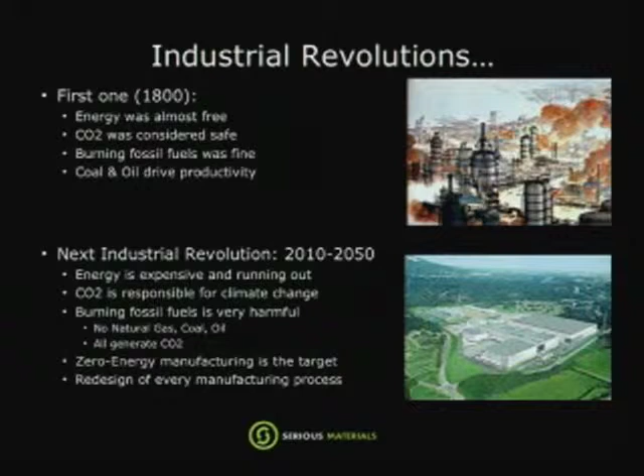I'm going to start with the Industrial Revolution, back in the mid to late 1700s and into the 1800s, primarily the Industrial Revolution that arguably ran to the late 1800s in this country. The Industrial Revolution actually started in England, and England at the time was an absolute powerhouse of the world, the big country that sort of controlled the world. They had all the technology. We were too young to start in the early part of the Industrial Revolution, but we came in later, and by the mid-1800s we owned it, and we did very well with that.

But the Industrial Revolution was built on some concepts that are just plain wrong by today's standards. First of all, energy was free. The entire Industrial Revolution was built on the concept that we had a steam engine, and later gasoline engines and other things that could run on natural gas and oil and these kinds of fossil fuels, and that they cost so little that basically we could eliminate hundreds or thousands of jobs and just have this machine do that job. And that was the concept. And CO2 was safe, it was just a clear gas. In fact, we probably barely knew how to measure it. Burning fossil fuels was great, and coal and oil drove that productivity.

But today there's a new industrial revolution, a next industrial revolution that we have an opportunity to lead. And we have an opportunity to lead it because all of the premises of the Industrial Revolution back in the 1800s are now wrong. Because fossil fuels aren't safe. You just all raised your hands about the environment. We know what carbon pollution is, we know what climate change is, we know how this is affecting the environment. So, if you follow this premise, we get to actually redesign most of everything you've ever known in your life, because it was all designed during the Industrial Revolution.

This is a very interesting chart. It tracks the relative share of world manufacturing output, going back to the 1700s. Notice that around 1950, just after World War II, we peaked—we made 45% of the world's goods. They were made in the United States. We made them all and sold them to the rest of the world.

People gave us dollars, and we paid back our debt from World War II—that's exactly what we did. We owned basic science, applied science, and manufacturing. We invented, manufactured, and installed here. It was a spectacular time in the economy. From the 1950s, it fell through the 70s and continues to fall.

The big change here, this red thing, is China coming up. There are some projections for the next 30 or 40 years, and you'll see that the United States continues to get crushed while other countries maintain their smaller statures. Japan, which was bigger, is going to get a little smaller. That's the relative change in manufacturing output across the world.

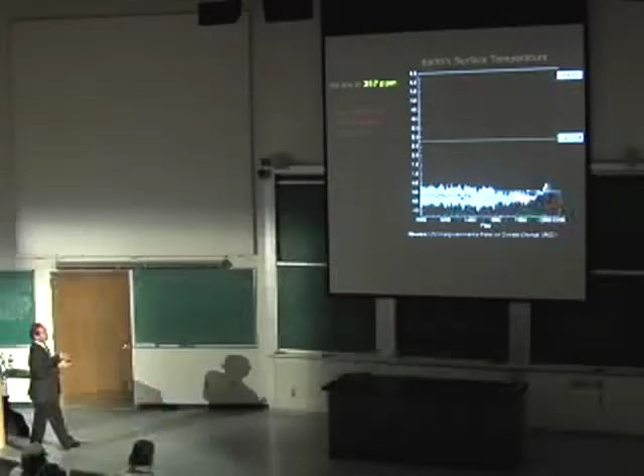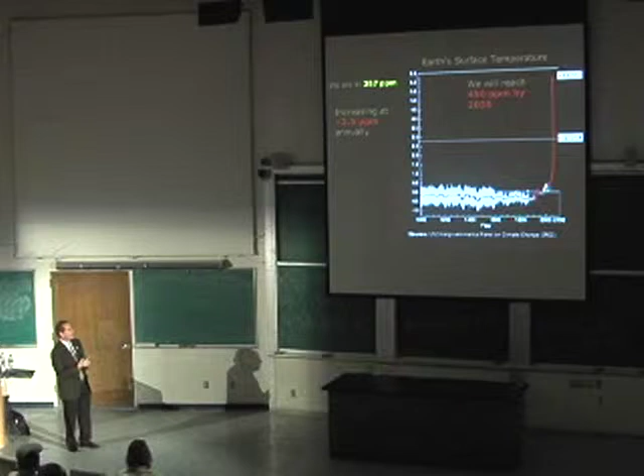At the same time, we've got this climate change thing happening. We won't go into a lot of detail, but we'll remind ourselves that as CO2 goes up, the temperature goes up—depending on who you listen to and what part of the IPCC you look at, somewhere by 2100 it could rise as high as 11 degrees Fahrenheit. This is real, this is happening, and we can look at a lot of data here.

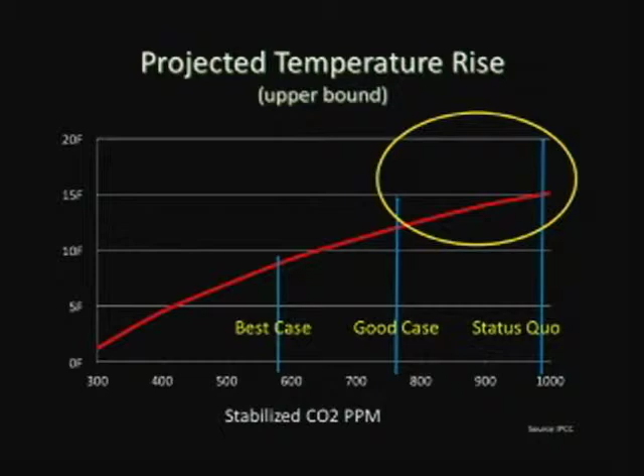This is another thing that comes right out of the IPCC, looking at best case, good case, and status quo. We're not saying how many years this would take—it could be 100, 150, 200 years. But if you look at stabilized CO2 ppm in the atmosphere and how many degrees Fahrenheit the Earth's temperature would rise, where we're headed right now is sort of into this range.

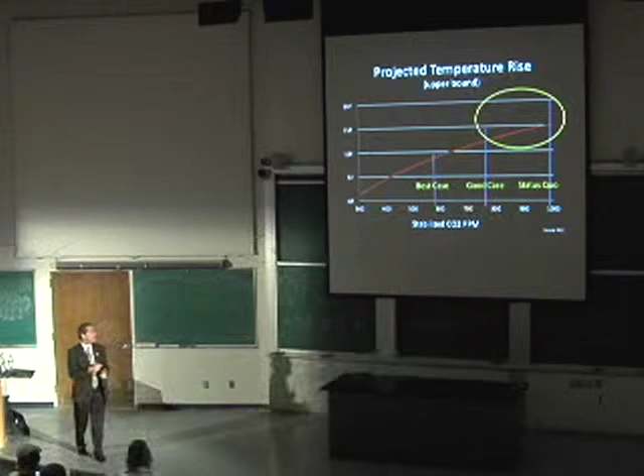If it's business as usual, somewhere between 750 and 1,000 ppm is where we'd finally stabilize—maybe 150 years from now—but that's a 15-degree Fahrenheit rise in the Earth's temperature. I assure you, we cannot survive with that kind of rise. We might live somewhere that's currently very cold, like northern Canada, but we won't be able to survive in other places.

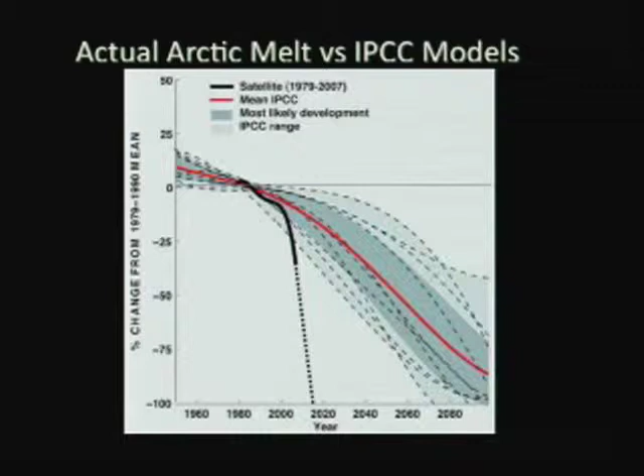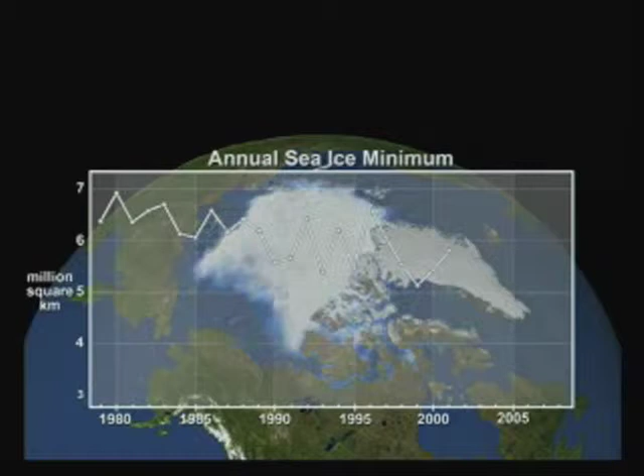This is the actual Arctic melt versus IPCC models. The IPCC models were very conservative—they said we'd see melting around 2100. This is the NASA projection currently, around 2017, based on satellite data from the last few years. It looks like we're going to have an ice-free Arctic much faster than we thought. These are actual satellite photos from each of those years, tracking it down until you can see we're more than halfway gone.

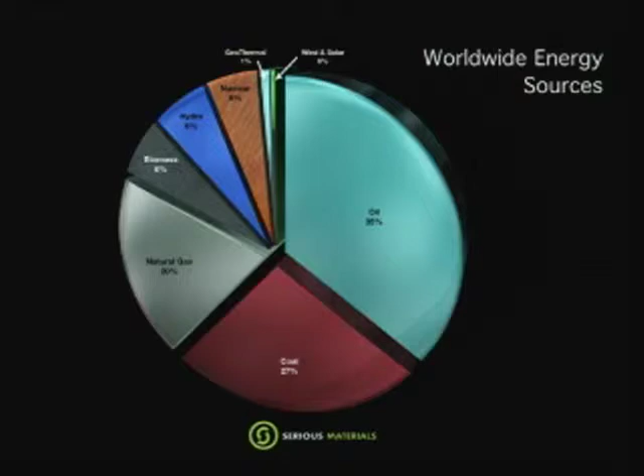So there's a lot going on here that's important. And the cause of all of this is what? Primarily it's fossil fuels. Now, this is a challenge for us because we have worked certainly since the 70s to put wind and solar all over this planet. And there are some countries that have tremendous amounts of wind. Right now, Germany and Spain have had great success with solar over the last few years. And obviously, we're pumping out solar panels as fast as we can throughout the world. And at the same time, as I stand here, wind and solar add up to 0% of the world's energy supply. We're not even at 1. We're at 0.

Now, that doesn't say we shouldn't do it. Don't mistake my words here. It just says this problem is huge. It's gigunda. And we're going at it with, you know, throwing little ants at it. Ooh, we made a solar panel. We put one up. And look, that's great. And I want you to do it. But we have to make billions of them. We have to make more than the entire output that we can possibly imagine of solar. In fact, as we look at where energy goes, I'll talk about how we can possibly use solar as part of the solution, but not a big part.

Worldwide energy-based CO2. This is a surprise to most people in this room. It's not that much of a surprise worldwide, but it is a surprise here. This is worldwide energy-based CO2: building operations and building materials. This is the making of building materials every year, and this is operating our buildings. Those add up to 52%.

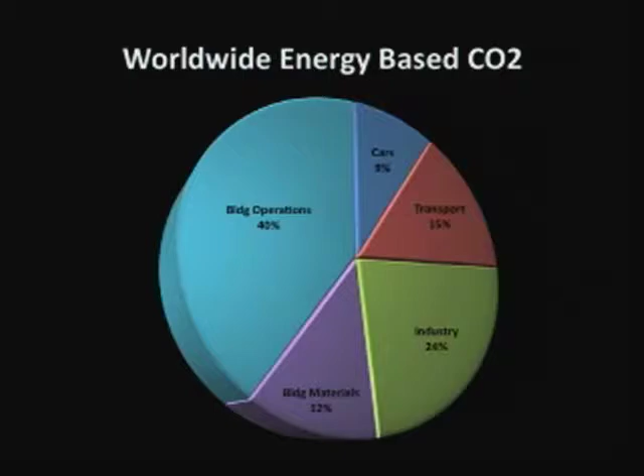Cars, passenger cars, the ones we drive, 9%. Now, in America, we think of cars as big, like the majority of it. Well, it's not generally the majority anywhere in the States, but it's equal to buildings in some areas of the United States, especially California, where we use our cars a lot. But when you look at the entire world as a picture, and CO2 is a worldwide issue, cars are tiny, and they're going to get solved with electric vehicles.

Buildings are huge. Now, that's interesting because it tells us we've got a problem, but it also tells us we've got a great opportunity. This is the worldwide energy demand, total worldwide energy usage today: electricity, gas, oil, transportation, everything that's used. Industry, about 12 to 14 terawatts per year.

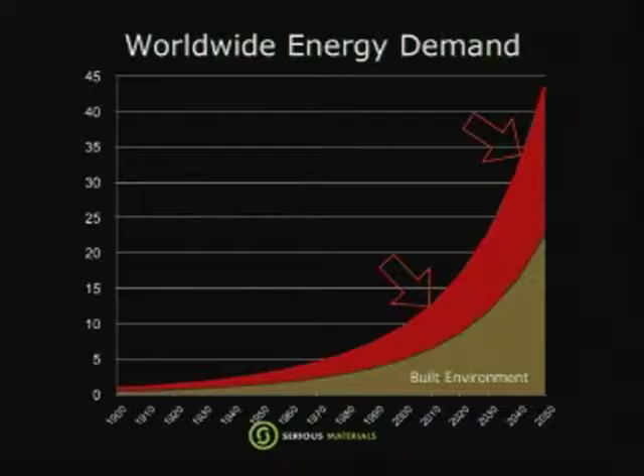That's growing, depending on who you listen to, somewhere between 30 and 40 terawatts per year over the next 30 or so years. So huge growth, more than doubling, some people say tripling, of the requirement for overall energy.

Now, here's the real truth of the matter. In our wildest dreams over that 30 years, the best experts in industry and solar think maybe we can get 2 or 3 terawatts out. And that's building a lot of solar panels and a lot of solar plants, 2 or 3. Now, I would love to do 3 terawatts. That's huge, except it's only 3 out of 40. There's the problem. We use energy faster every year than we can possibly make up for with any new technologies right now. This is a serious issue.

This is the way the world is trying to get there, by the way. So the world hasn't exactly run out of energy. What it's doing is digging up more coal. And at this time, as I stand here, worldwide, we build about 4 coal plants a week, 1 to 2 a week in China alone. And we'll build 6,000 of those, and we'll get 18 additional terawatts out of that. That's what the world is doing. I'm not saying it's right, but that's basically what the world is doing.

Now, the positive here is that we invent. In fact, this country, our colleges, our universities, our students, you invent. And we've been extremely inventive. In fact, most of the solar has been invented here, wind, biofuels, but also today, much more focus on energy efficiency. And you've probably heard some about this story, but in energy efficiency, we have a tremendous number of plays.

And energy efficiency equals negawatts. And negawatts mean we don't have to pay for whatever it was, whether it's electricity or oil or gas, and in fact it gives us money back. So there's a tremendous opportunity. And in the built environment alone, if we could save in operations and manufacturing 75% of that, we could in fact reduce worldwide energy by 12 terawatts right there in 2040.

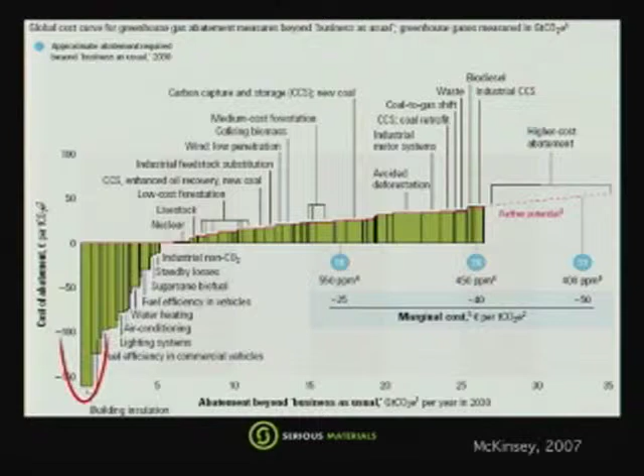The McKinsey study, which many of you have probably seen, it's the third year it's been out. It basically says this: they figured it out. You get more money back from efficiency.

But McKinsey and NRDC at this time failed to consider new technologies that are already available in the marketplace today, including some that I'll talk about today.

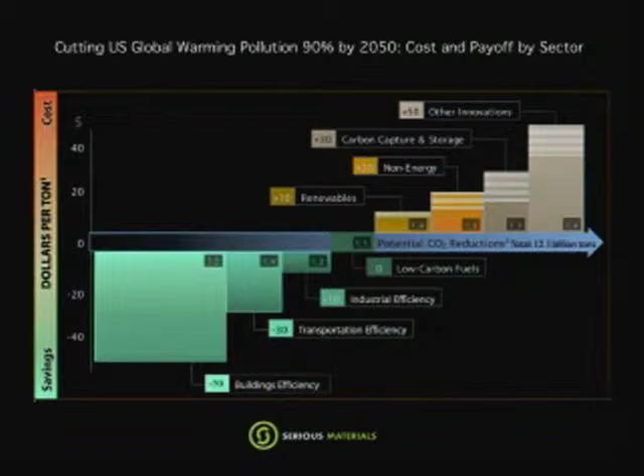And when you consider those new technologies, probably including things you're working on, this is what happens. All of a sudden, building energy efficiency gets virtually twice as big and even pays back more. So in fact, it's a place that we can absolutely work together and really make a difference on.

So the premise of what I said earlier about America and saving America is that we have to invent, manufacture, and install. And I don't believe that we can just invent or just install — we really have to do all of these. We want to invent here, we want to manufacture here, and we want to install it here. And in fact, we want to invent here and manufacture here and install in the rest of the world too.

This is an area that we can win in. This is an area that we can recover our economy. This is an area that we can recover jobs.

Now, of course, there's all the traditional jobs of solar installation that everybody likes to talk about. Those are the things you think about with green jobs: inventing solar, installing solar, inventing wind and installing wind. By the way, in solar today, 95%, virtually all the solar technology is invented here. 95% of it is manufactured somewhere else. Only 5% is manufactured in the U.S. I don't think that's going to help us.

Obviously, wind is certainly a big field, a lot of work. Biofuels, a lot of work, a lot of material science here, a lot of chemistry. But in fact, I know several companies that are working on more efficient motors in ways that don't have all the pieces that are normally in a motor. It doesn't look like a normal motor. They sort of rethought the entire fundamentals of motors and engines — some great work being done on engines in this country that can be 20, 30, 40% more efficient than what we've got in cars today.

Obviously, air conditioning, cooling, heating in buildings, appliances have come a long way. We're seeing water heaters change. Smart grid, where there's a lot of software, a lot of storage, a lot of thinking about what we need to do there is occurring.

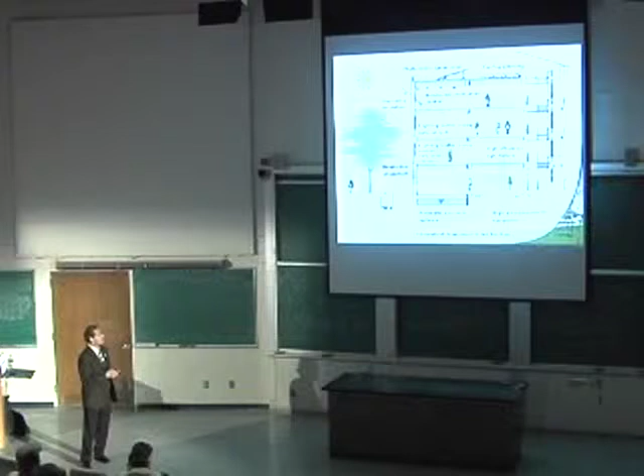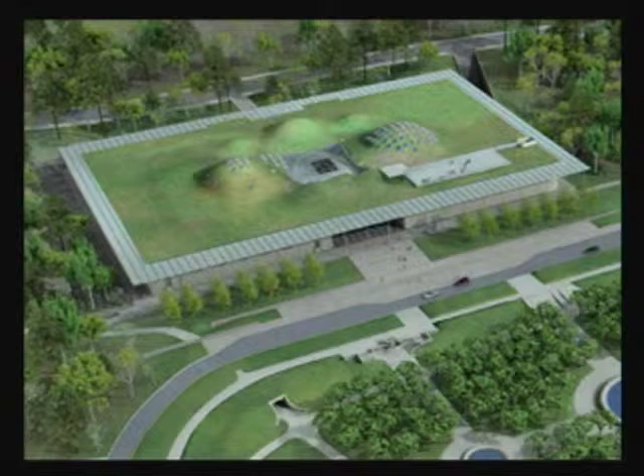These are great LEED platinum structures, by the way, so it gives you an idea of what is being built today. I'll show you the California Academy of Sciences here, which was just done last year. It's beautiful, it's up in the San Francisco Bay Area. If you haven't seen that, it's really a stunning building.

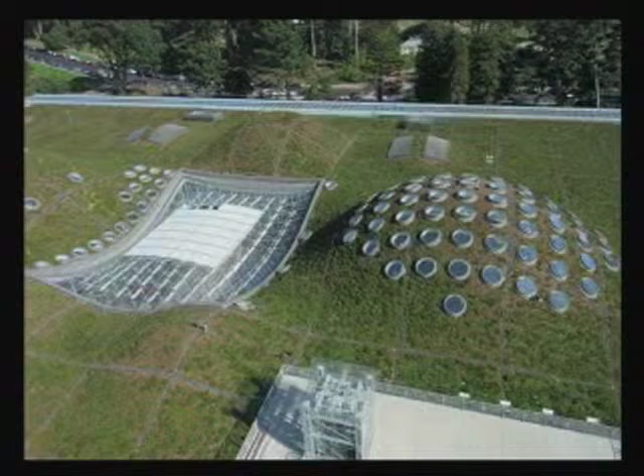Many of these buildings are being pushed towards net zero energy, which means they really don't use any energy at all — they generate at least as much energy as they use, or more. And of course, homes that are green as well, really being thought through for how you do zero energy homes.

So now there's new jobs, and when we talk about Silicon Valley, you know, if I was here 10 years ago, because I came out of traditional tech, all we would have talked about was software and hardware — that we only need EE's and we need CS degrees and we need IT degrees, etc. But now we need actually new degrees. We need things that we haven't needed for probably 30 or 40 years, and we need them badly: material science, chemical engineering, mechanical engineering, sustainability design and engineering — all things that you do very well here.

It's not that there aren't opportunities for software and hardware in this space as well, because there are. But there are more jobs in areas that since the 70s we didn't need badly, and now we need very badly. And that's good news for those of you who have touched or are in those programs.

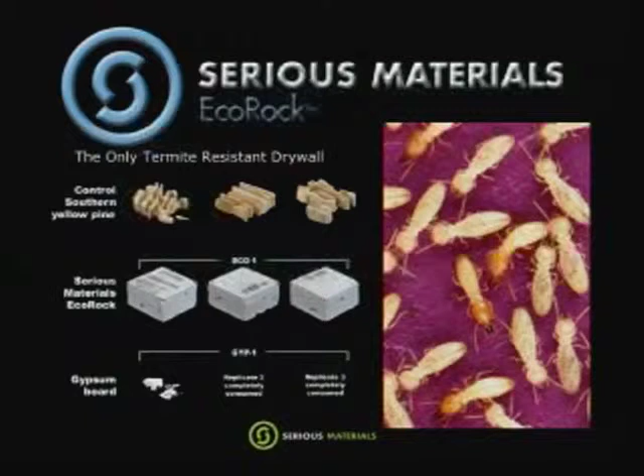This is interesting. These are actual pictures from the lab - I'm sorry for blowing up termites that large. This is really interesting because you'll notice that the termites in the lab eat the wood, but they don't eat all of it. They don't touch EcoRock, and they completely eat the gypsum. You go, why would a termite eat gypsum? Well, because gypsum board has cellulose in it and also has starches in it, and starches are sugars after that temperature anyway. So they want the sugar, and they'll completely consume the gypsum board to do so. In fact, gypsum board is eaten by termites more so and quicker than southern yellow pine would be. Very interesting, but they won't touch EcoRock.

When you redesign a product from scratch, you can truly rethink all the needs of the customer. Rather than going to the customer and saying, I own a gypsum mine, therefore I'm going to deliver to you a gypsum board, we can go to the customer and say, what are your problems? What are you actually trying to do with that wall? The first thing you're trying to do is cover up the studs with something you can paint on, which is primarily all a gypsum board does. It's not really there for structural use, it just happens to be there for decorative use - it's just the cheapest way to cover up the studs.

Once you think about that, you say, okay, what other features can I bring? Can I make something that's 50 or 100% more mold resistant than anything you've ever had before? Can I give you something that's termite resistant? Can I give you something made of 80%, 90% recycled content? Can I give you something that generates less dust, that's cleaner to score and snap? Those are all the things we try to do with this product by listening to customers. Rather than saying we have a mine and I want to use it for your need, it's what's your need, how can we design a product for that? It's the first time that's been done, I think, in a long time.

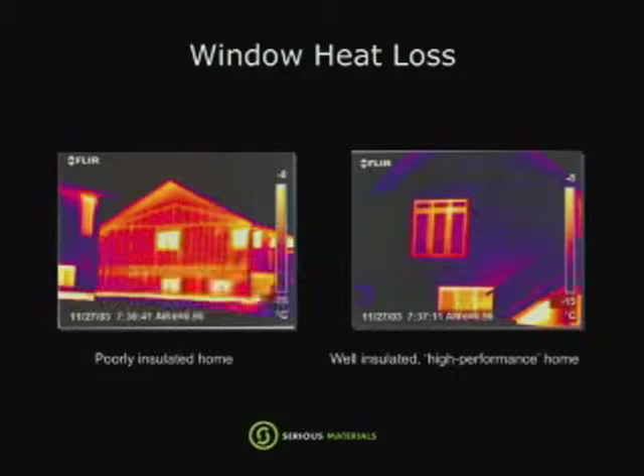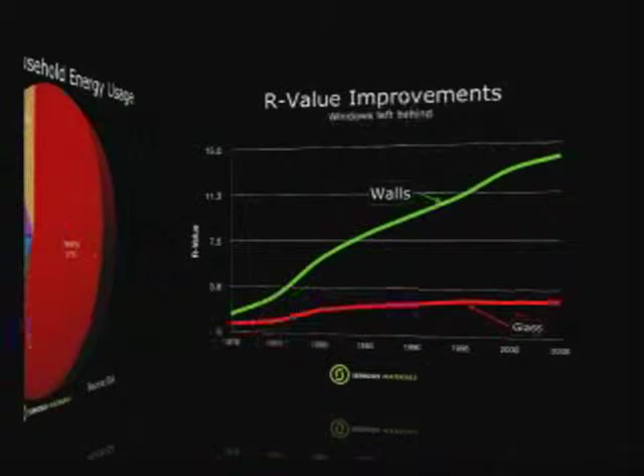I think the big surprise to most people is really two things. First of all, heating and cooling is the majority of the energy we use throughout this country, especially in the Northeast. This is usually a surprise to people, that we've dramatically improved our walls. Now let's talk about R value. Who knows what R value is? Anyone know what R value is?

R value is the resistance to heat flow through a wall, a window, a door, whatever. It's measured in BTUs per hour. It's an important value, and basically it tells you how insulative that is.

So if you're building a building and you know you want it to be 70 degrees inside, it's going to be something different outside, except for Santa Barbara, where it's always perfect. But aside from that, you know you want it different inside than outside. And the wider those temperature gaps get, the more you wish you had more insulation. When it's in Minneapolis and it's 12 below zero, you hope your insulation is saving you, because the lower that number, the more heat will be lost through it. The higher the number, the less heat, okay?

Our glass is typically R2 to R3 today. Now I know you're thinking, well, I've got dual pane windows, I've seen them in our house, I've got them here, I've got them there. The dual pane window was invented in 1865. And did not get any improvement whatsoever until 1978, when we began to put low-E coatings on windows.

1978 — would you carry an iPhone that was made in 1978? In fact, would you have anything made in 1978? Probably, if it's something your parents gave you as a memento, but it's not something you'd use. We still had vinyl albums then. So the point is, technology has moved so slowly in these areas that we're generally using technology from 50, 100, 150 years ago.

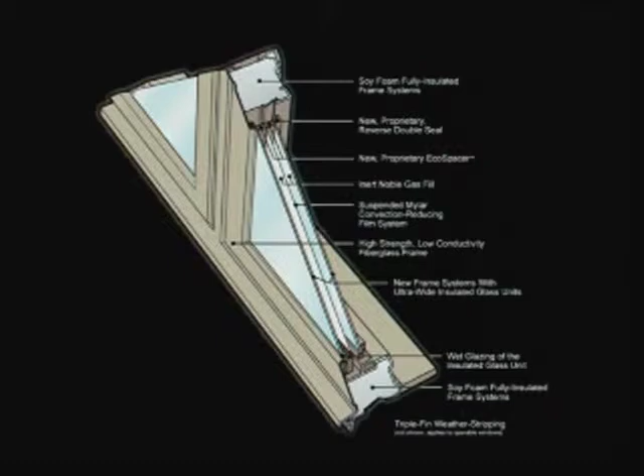Everyone knows hot air rises and cold air falls. When it's cold outside and hot inside, what happens? The air against the inner pane starts to rise, and the air against the outer pane starts to fall. They set up this beautiful current inside that's actually fairly rapid, but you can't see it — it's just turning in there. And what's it doing? It's taking your hot air and bringing it to the outside, and taking the cold and bringing it here.

In the winter, when it's 32 degrees outside, a dual pane window will be about 43 degrees on the inside — not very warm. We've got product that'll be 65 to 70 degrees on the inside because it's more comfortable, since you've got this film in there that reduces it by creating multiple chambers — we can do 1, 2, 3, 4 chambers. And when you've got that many chambers, there's less temperature differential between each one, and because of that you get less of these currents setting up. Finally, they virtually don't set up because there's just not enough temperature differential.

So that's how you drive the R value at the center of glass, and then you have to do nine other things to get the R value up across an entire window system, whether it be commercial glass, operable windows, or inoperable windows. So the net result is this: the average commercial window in the country today is between R0.7 and R1.4. That's pretty much the range of commercial windows.

The ones here are R1.4. They're actually an R2 center of glass in an aluminum frame, which takes it down to about R1.4. That's what's in this university — I noticed as I went by. You start to notice these things, which I'm not sure is particularly good. Major brands of residential windows are R2 to R3.

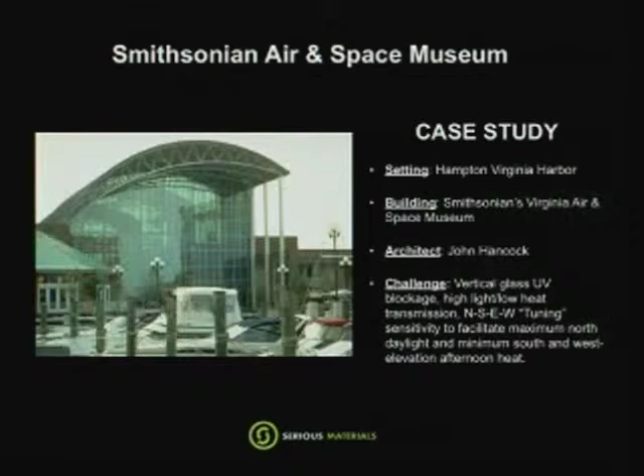I'm going to stop at a couple and dig into some really nice projects. This is a great project—that's all our glass there. That's in Virginia Harbor, the Air and Space Museum. A stunning example of a building that probably has saved 50 or 60% of its energy bill compared to what it would have been had they put in dual pane glass.

This is a wonderful example because it's a building that probably everyone knows: the Empire State Building. Anyone ever heard of that? Okay, who's still awake? Excellent, three of you. No? Okay, we'll keep going.

The Empire State Building has a $13.2 million retrofit program. The partners in this, which were numerous, were Johnson Controls, Clinton Climate Initiative, Rocky Mountain Institute, and JLL, who manages the building. Out of everything they looked at, they picked 8 major energy efficiency projects that they felt would give them the biggest bang for the buck. They wanted to reduce overall energy usage, electricity and HVAC, by 40%, across the board.

They're going to finance that over 15 to 20 years and save money on day one. Does that make sense? They save money on day one because the payback is faster than the financing time, so the financing charge is lower than the energy savings you're getting. The only people losing here are the gas and electric company—everybody else wins. These are the stats for the windows we modeled into that, and I'll say this project has not yet kicked off, so it's not fully funded yet.

When it gets funded, we think that's going to happen soon, then we can talk in more detail.

I'm going to give you a little more data on the windows. This is the technical data. To be clear, there are other pieces of windows that are important, solar heat gain coefficients and visual transmission levels and things like that. So we've tuned these to each side of the building to make them work.

But when you get right to the kind of glass that we've modeled into this project—and again, to be clear, the project hasn't issued yet, but that we've modeled into the project—6,500 windows, and we're going to use all the glass over again. So the glass that's already in there, that was only installed 15 years ago, we're going to pull out, take it apart, clean it, clean up the edges, and reuse that glass into a high R-value assembly.

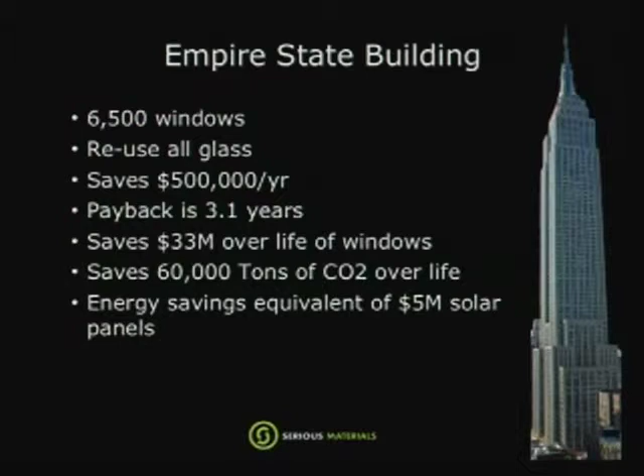It's never been done before, but it's very, at least on a mass scale like this, very very cool reuse of materials. There's no reason to just crush it and throw it in the dump.

It'll save $500,000 a year, inclusive of the extra boiler that didn't have to come back to the building. So they're taking the boilers out. They're going to replace all the boilers except for one with a higher energy efficiency one, and they don't need that one anymore because the windows save so much in HVAC that there's one boiler that goes out the window.

Literally goes out the window. Saves $500,000 a year. Payback is 3.1 years. Saves $33 million over the life of the windows with a 4.5% increasing energy cost, and that's 60,000 tons of CO2 over the life of that product.

Energy savings equivalent of $5 million of solar panels. Fairly interesting, right? Very interesting case study. Let me give you a bigger case study.

It's the Sears, now Willis Tower. Again, this is not an issued project yet. It's not a project that people have written any checks for, but it's a project that is under discussion from a modeling standpoint. In modeling this building—it is the largest commercial office building in the U.S.—there are 16,000 windows in this building.

We would be replacing R1 curtain wall glass with R8. That's a substantial improvement over what they've got, although we're modeling R10, R11, R12. There's some different things in there, but looking for the fastest payback, that'll save approximately $2 million a year in energy cost—$2 million a year, $100 million over the life of the windows, 150,000 tons of CO2 over its life, for one building. So you can have a huge impact with quite realistic technologies that are there today, with more coming.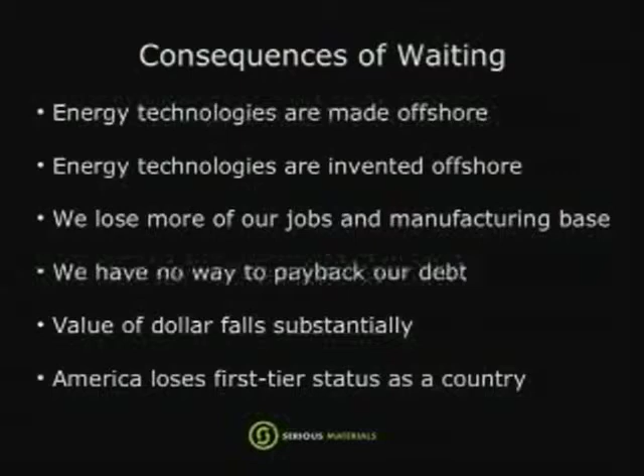So we really have to act now, and the consequences of waiting are quite substantial. Energy technologies end up being made offshore. They're invented offshore. We lose more of our jobs and our manufacturing base. We have no way to pay back our debt. The value of the dollar falls substantially, and America loses first-tier status as a country.

I prefer that those consequences don't happen, at least on my watch. I don't think I want that to happen on my watch, and I don't think you want it to happen on your watch either. I think there's a lot that we can actually do here.

So let's talk about the actual opportunity, because I think it's the opportunity that we're going to actually act on. First of all, we must change everything, and we get to change everything, because it was all invented in the 1800s, so we get to really change everything. Don't listen to people who say you can't do it.

And I would tell you, if you build it, they will come. Does anyone remember the movie?

I know I'm dating myself when I pick up movies from the 80s, but it's a good movie actually. And seriously, if you build it, they will come. Now I don't mean you should go out and build a ball field. But I do believe you can work on technologies, business plans, and business models that address energy efficiency, energy conservation, and energy independence, and there will be no bigger field to work on over the next 20 to 30 years than that. There is no bigger field, without question. Not only that, today we've had tremendous job losses, and green tech is beginning to save jobs.

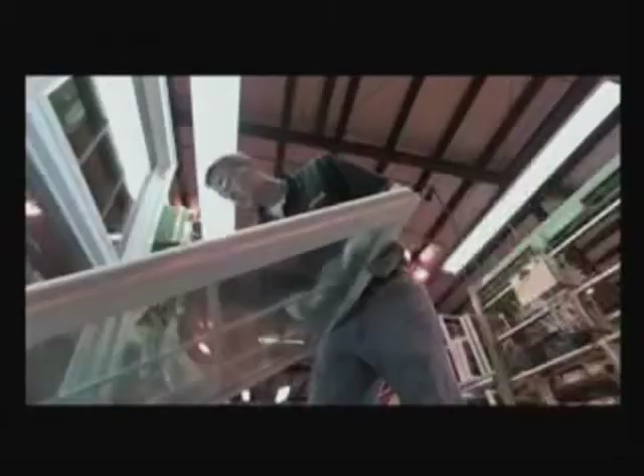Green jobs are the jobs of the future, not just because they pay well and can't be outsourced, and not just because they help strengthen our economy and lift up our middle class, but because they help us reduce our dependence on foreign oil and may just save this planet for our children.

Republic shut its doors very suddenly early last month, but the 300 or so workers at the plant refused to leave the factory.

Get this, a deal for a California company to buy the former Republic Windows and Doors company.

Tax credits are encouraging homeowners to make their homes more energy efficient. The single greatest immediate impact on the environment that we can have as a nation, and the world can have, is weatherization. That's the immediate biggest bang for the buck.

You're not just churning out windows, you're making some of the most energy efficient windows in the world. I would argue the most energy efficient windows in the world.

You know, six months ago, this plant shut down, putting 150 people out of work in this town. I know it was a tremendous body blow for Vandergrift to see a cornerstone of this community close up shop.

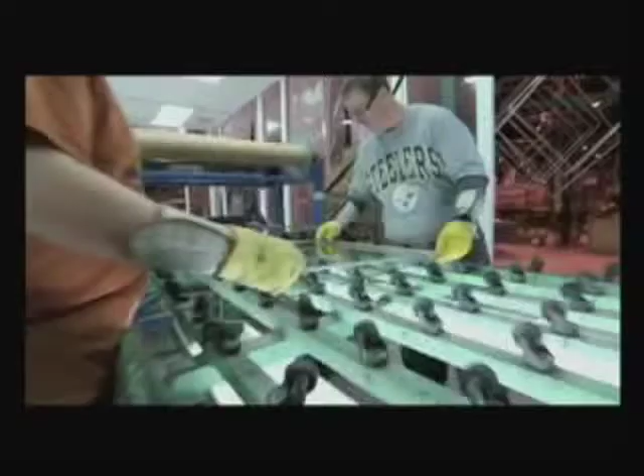But today, we start rebuilding. Today, we write a new beginning to this story. This is more than just a job to me. It's also doing our small part in this tiny corner of America to move this country forward. It is time to fight back, and it is time for hope.

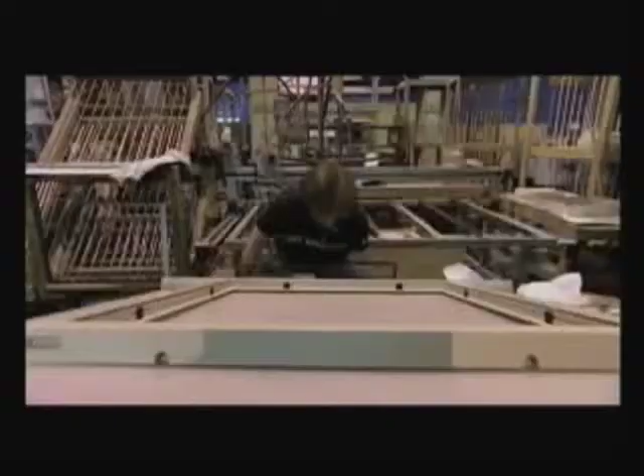One of the reasons I came here today is not only because it's such a great announcement, not only because Serious is such a good visionary company, but because there's good news. And amidst all the bad news, there is good news out there. And it's up to us as leaders, it's up to us as citizens, to take that good news and run with it. Anybody need some energy efficient windows?

Union made in the USA? Well, that's a good news story.

But what I do want to say is that we've got a call to action. We've actually got a call to action in this room, because we can invent energy tech literally right here. In fact, you are inventing these kinds of technologies here. There's no reason to let any other country take the lead from us.

We can leverage the innovation, we can address climate change, bring manufacturing back to America, specifically in energy and energy efficient technologies, lead the world in the next industrial revolution, and someone's going to do that, mark my words. There is a next industrial revolution, it's here, we have to do something about it, and the future leaders of that industrial revolution are sitting right here in this room.

And the net result is paying back that $12 trillion in debt. So, I am looking at you as a call to action to do something that often speakers probably don't ask you to do.

I'm sure you learned some things and you copied down. I saw people take some notes. I saw people go to sleep. Someone's still asleep over there. That's fine. But more than that, what I want you to do is leave the room with an action item for yourself.